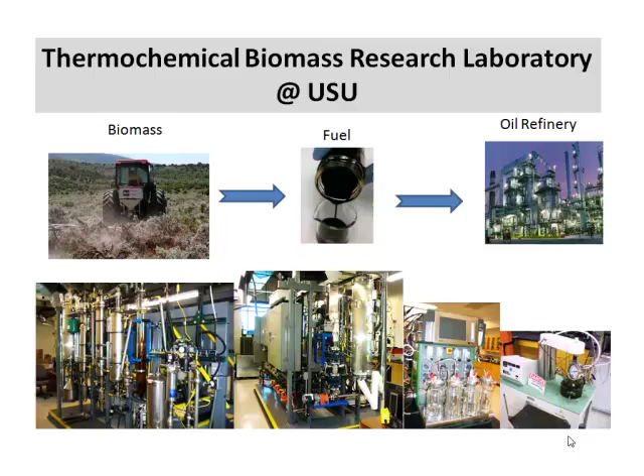As we've already heard from our previous speakers, the utilization of forest residues in producing some form of energy is a strategic approach, because the truth is if you don't do that, then climate change and other circumstances will do that at a cost for you.

Either the wildfire will come and you will have to spend money then. So definitely it is a strategic approach. Whether it's the best way, I think is a starting point.

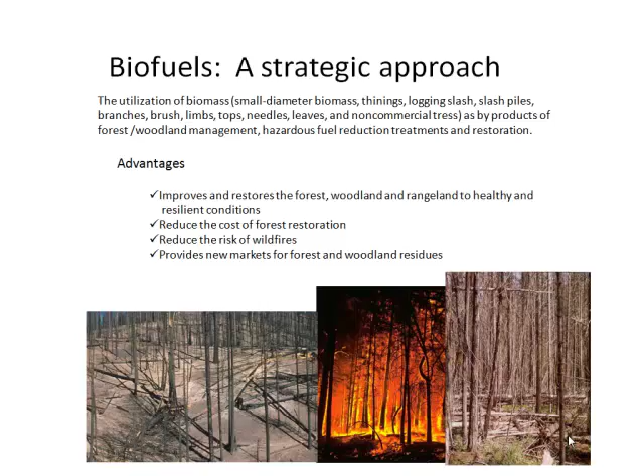I just listed a whole host of feedstocks, simply to present the idea that thermochemical platforms are advantageous because they are not feedstock dependent like biochemical platforms, whereby you have to use enzymes to convert the lignocellulosics into bioethanol. Some issues include inhibition that can destroy the enzymes, but with thermochemical conversion you can use anything. The quality of the biomass is important, especially the ash content, but overall it's not feedstock dependent.

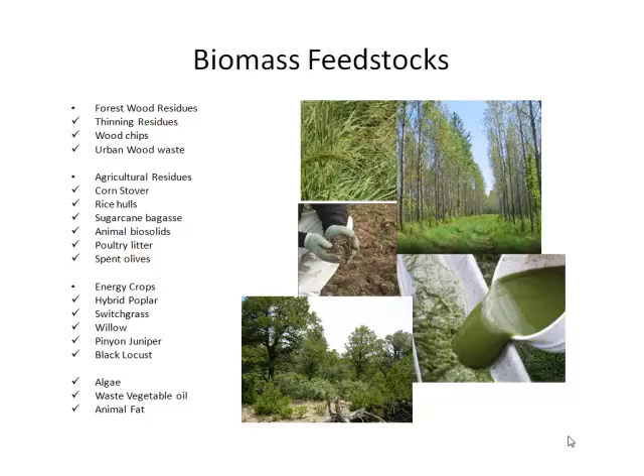So the main thermochemical conversions we've used in our lab are based on slow pyrolysis, where the main goal is to produce solid residue. This has existed for a very long time; it's the process used to produce charcoal.

And now we have fast, or flash pyrolysis, where the goal is to produce liquid product. You thermally heat that in the absence of oxygen, and then you produce some form of oxygenates in a form of vapor that you can condense.

And gasification, as we've already heard from our previous speakers, is one of the routes you can use to produce vapors that can generate electricity. With gasification, you have elevated temperatures, and the goal is to produce gas. Gasification is a combination of pyrolysis, because the initial reaction would have to go through pyrolysis to produce that, and then you have combustion of the char to enhance it.

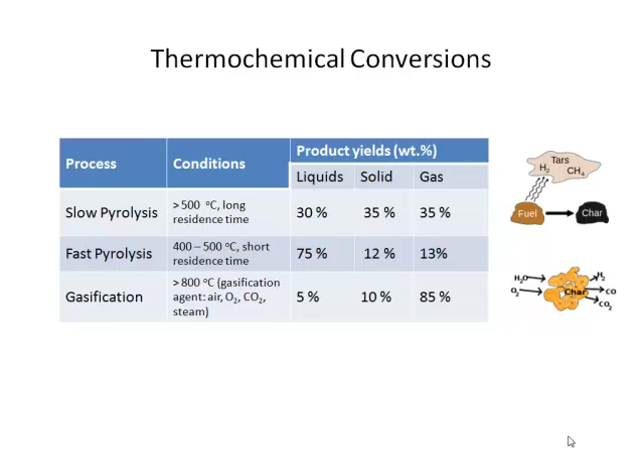This is just to give you an overview of gasification, and our goal is to produce fuel—methanol, methane, DME, that is dimethyl ether, and some hydrocarbon fuels using Fischer-Tropsch technology.

You can also use gasification for cogeneration of electricity, and the previous speakers have already touched on that, so I won't emphasize it much. Depending on your oxidant, you'll be able to produce different compositions that will direct the synthesis of these fuels.

So I've just listed some of them, and this is the hydrogen to CO ratio, which is important in terms of the quality of the syngas.

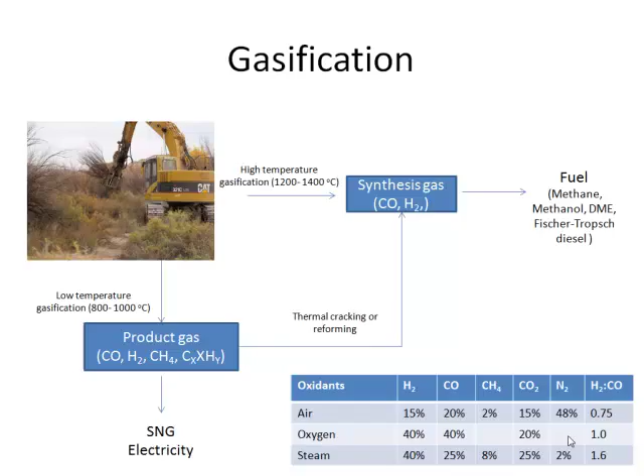This is just to give you an overview of some of the gasifiers available and their scale. Generally, we have fixed bed or moving beds, either updraft, downdraft, or cross draft, at a scale of 0.2 to 5 megawatts, which is pretty small.

Fluidized bed reactors, including bubbling and circulating, are another type of gasifier, at a scale of around 5 to 100. The biggest in terms of output is the entrained flow gasifier. We also have other types like the rotary kiln and combined pyrolysis and gasification units.

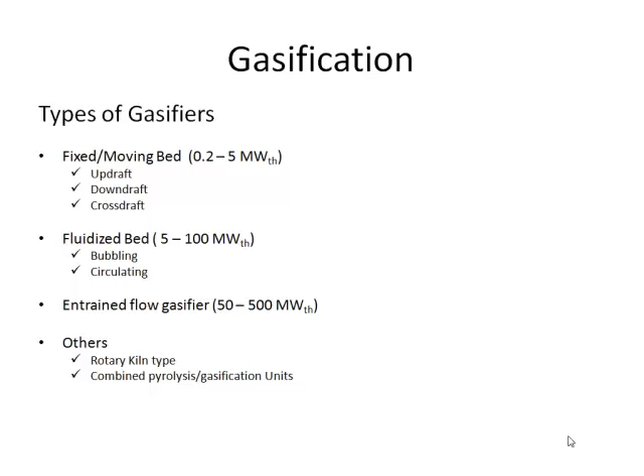And the next slide will look at the advantages and some of the disadvantages.

For biomass gasification, fluidized bed has at the moment been proven to be an effective reactor, because you don't have a limitation in terms of fuel preparation. For instance, a fixed bed has just a limited tolerance for fines—you would have to use coarse materials for that. Also, the entrained flow is limited because it has a poor tolerance for coarse biomass, but overall the entrained flow can produce syngas that has low tar content.

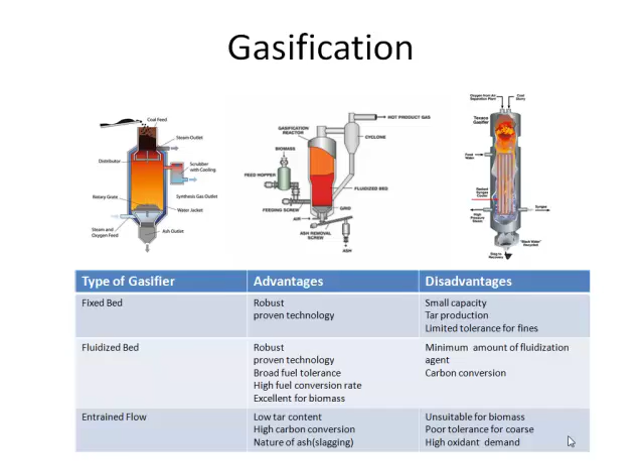And I'll talk about tar, which is one of the issues that affect the synthesis of hydrogen and CO into other fuels. So that's just about that. So, applications.

We know that you can gasify biomass to produce electricity, and you can also use that to produce some form of fuels. As I already mentioned, you can get methane, methanol, DME, and hydrocarbon fuels by Fischer-Tropsch.

This table gives you an idea of some of the operating conditions used to produce these fuels. As you can tell from the syngas quality, for methane you need a hydrogen to CO ratio of about 3 to 1. For methanol, it has to be about 2 to 1. For DME, you have 1 to 1. And for Fischer-Tropsch hydrocarbons, you're looking at 2 to 1.

The particulate content and the tar content really matter in the synthesis of these products. For syngas production, we're looking at particulate around 0.02, and for tar content, you're looking at 0.1. If you're just doing direct combustion to produce electricity or steam, it doesn't really matter—there's no limitation. So basically, the quality of the gas or syngas depends on the application, but our emphasis is more on producing these products.

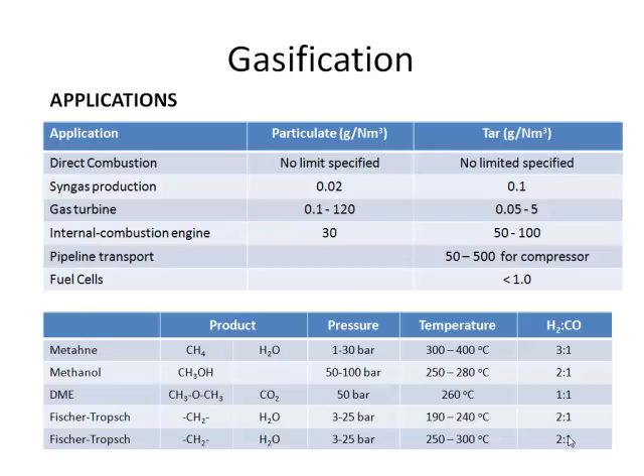Syngas cleanup is one of the important stages in the production of fuels like DME, methane, methanol, and FT hydrocarbons. You can do this two ways: in situ or post gasification. With in situ, you end up with a tar-free product, and then what is left is your dust cleanup, and you can get the clean gas that can now go into an FT synthesis.

With post-gasification, you have your product with the tar, then it will go through some downstream processing to clean up, before you can do your FT synthesis.

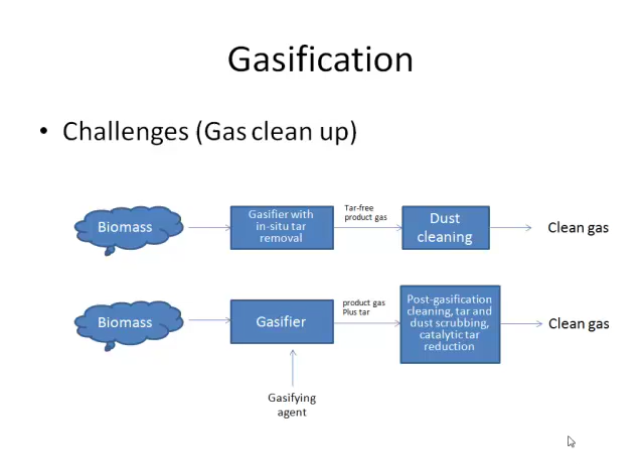So what is tar? Tar is just a complex mixture of condensable hydrocarbons, and you have polyaromatic compounds and 1 to 5 ring aromatics as well, and some oxygenates.

With in situ gas cleanup, you can achieve that by controlling the operating conditions, that is temperature, pressure, residence time. For fluidized bed reactors also, you can use a catalyst as a bed, and with that you'll be able to do some form of tar cracking.

With post-gasification, you can either do thermal cracking, which is at a high temperature, or catalytic cracking, which is at a moderate temperature, and that is more of tar reforming. Then the last stage is more of the scrubbing of the gas and the separation and filtering, and that can be done at low temperature.

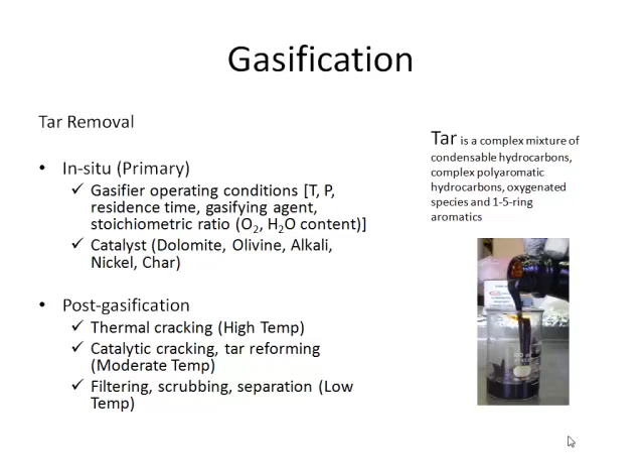So this is just a brief overview. I'll change course now and talk about pyrolysis.

Pyrolysis, as I already mentioned at the beginning, is one of the routes you can use to produce energy, and the focus here is to produce liquid product. You do that in the absence of oxygen at a moderate temperature of about 500 degrees C, and that happens rapidly, in less than 5 seconds.

You produce some vapors. Some of them are non-condensable, and the non-condensable mixtures include CO2, CO, methane, and some light hydrocarbons. Then the condensable come in the form of this dark brown liquid with a smoky odor, and basically what you can do with this oil is use it as a heating oil, and it can also be considered as a chemical feedstock, and you can extract some liquid smoke out of it.

Currently, the only commercial unit in existence is by Ensyn. They use that to produce chemicals, not in terms of transportation fuel, and they extract liquid smoke out of it.

The solid residue, biochar, as we all know it, you can use as a soil amendment or as a slow release fertilizer, and that is dependent on the biomass, because it's not any biomass that you can use as a slow release fertilizer. With our previous experiments we've used chicken litter, so that has NPK. Basically you have a biochar that is rich in phosphorus and potassium, and you can actually use that.

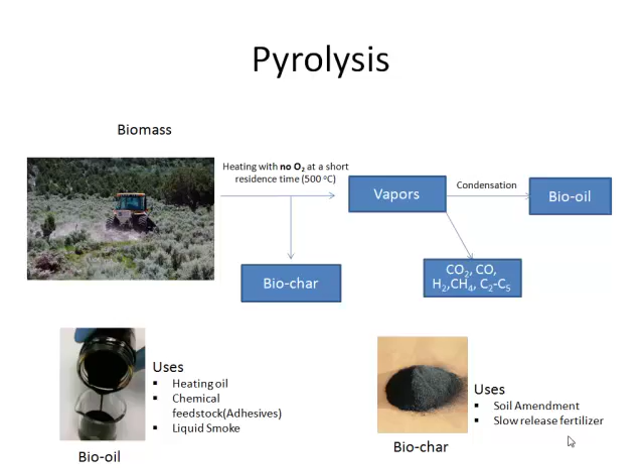Okay, so just some quality about the bio oil. Yes, we can use thermochemical platforms like pyrolysis to produce bio oil, but it stops as a heating oil. You cannot actually go further in its application, and that's because of its properties.

If you look at this table where you have these properties against heavy oil, you realize that the pH of any bio oil, averagely from woody biomass, is about 2.5. But if you take a different biomass that is rich in nitrogenous compounds, that can go up a little bit, and that's because of those nitrogenous compounds—they can go even up to neutral pH.

But for woody biomass, your pH is around 2.5, and you realize that it's low in carbon, and also it has low energy content. Look at the density, which is around 1.2 as against 0.88. Any oil that goes into the refinery is judged by what we call the API gravity, and this can go negative.

It's not good, so it can never go into... Distillability is also important. You realize that with heavy oil, even at 340 degrees, you can distill up to 90% of that oil. If you compare that to pyrolysis oil, you can go up to 250, but what happens is 50% goes into solid.

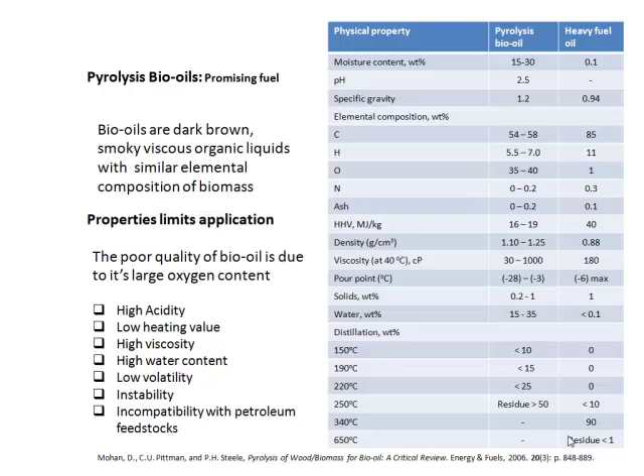But before I talk about it, I just want to talk a little bit on some of the pyrolysis reactors that are currently in use. We have fixed bed and or moving bed, but most research labs are moving away from fixed beds because it's not flexible.

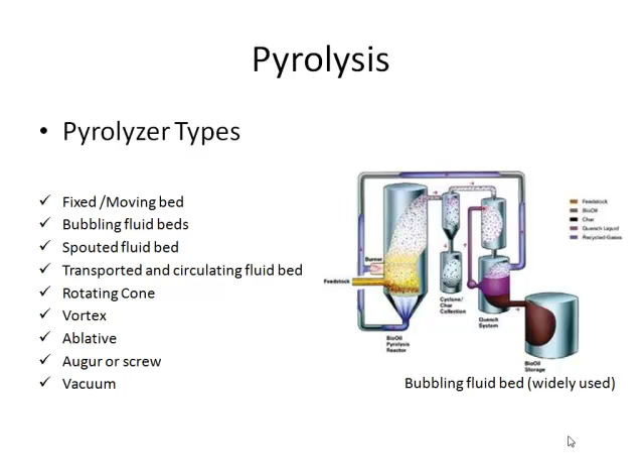Currently, bubbling fluidized beds are the most used reactors in the studies of pyrolysis. And then we have others like spouted and circulating fluidized bed. Circulating fluidized bed is more of a pilot demonstration type of reactor, but for small scales, bubbling is fine. And then you have the rotating cone, vortex, ablative, and we have auger and vacuum. These are all types of reactors that are being used.

So I just want to talk about how we are addressing the quality of the bio oil so that at least you be able to further process that into either a drop-in fuel or maybe as a blend stock, because we need to move beyond the heating oil stage.

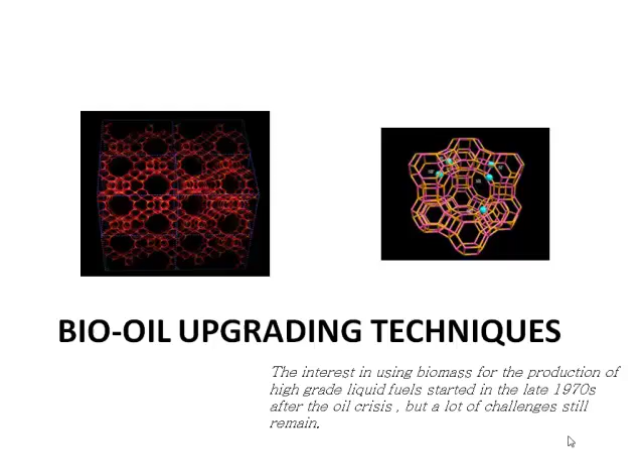Currently, there are two main routes that you can use: you can either use hydrotreating or catalytic cracking. These are all processes that are being used in the oil refinery, nothing new. With hydrotreating, it requires higher pressure, hydrogen, and also some metal catalyst. The only issue with hydrotreating is it's costly because you have to put in hydrogen and you have to put it at high pressure. But it is an efficient process in trying to upgrade the pyrolysis oil and to produce hydrocarbon fuel out of it.

Another method, as I mentioned, is catalytic cracking. With this, it's assisted with catalyst, and you can operate this at atmospheric pressure and moderate temperatures. The only issue is catalyst deactivation, that is the shelf life of the catalyst.

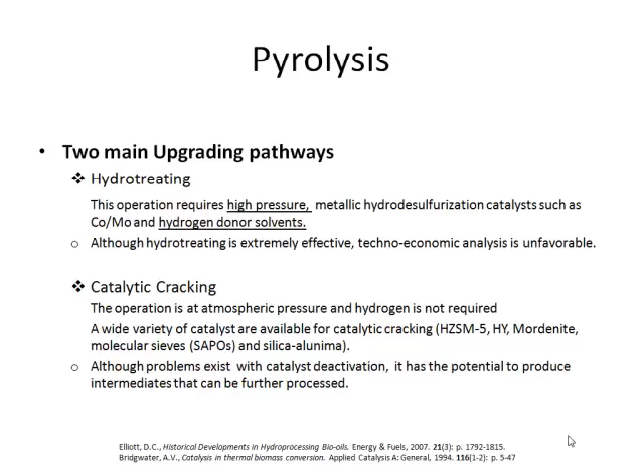But it is a promising technology, and most of my work has been on catalytic cracking using zeolite type of catalyst to produce upgraded oil. This is just a snapshot to give you an idea of the type of catalyst that has been used in upgrading pyrolysis oil. ZSM5 is a favorite and is the most used, and it's a medium pore size zeolite.

Y zeolite is also another type of catalyst that back in 1995 they started using to upgrade pyrolysis oils. The good thing with the Y zeolite is that it's the active ingredient used in the catalyst for FCC cracking in the oil refinery. So if we can apply Y zeolite, for instance, in upgrading bio oil, which means in the future you can actually co-process the pyrolysis oil with petroleum, because they will all together be processed with the Y zeolite. So there is a big interest in trying to achieve that.

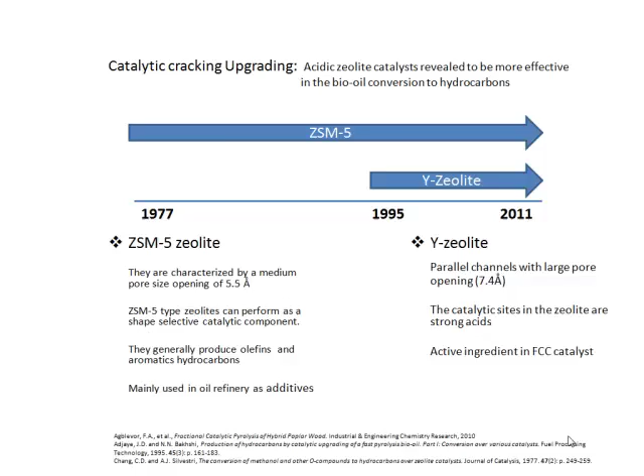And this is just a list of the characteristics of upgrading the bio oil by catalytic cracking. What you do is you lower the bio oil yield, and this is just conservation of mass. You have a bio oil that is highly rich in oxygenated compounds, and all you're doing is trying to remove oxygen to produce hydrocarbon fuel, so it ends up with a lower yield. Theoretically, you can get hydrocarbon yields just a little over 33%, so you can imagine your yield will drastically drop.

But what you end up doing is the oil becomes stable, it's less acidic, less viscous, and the energy content is increased. And now you can actually process that with petroleum crude. And then it also serves as a source of high-value chemicals.

We have been able to produce bio-oils via this route, and we've done blending of the bio-oil at 15% with crude oil. We co-cracked it to produce gasoline, and we've only done up to 25% of blending. We've also been able to produce chemicals like phenols that we've used as a substitute for phenol formaldehyde resins. So you can actually do that. This is just a snapshot of bio oil after upgrading. So that is the direction that our lab is just focusing on right now.

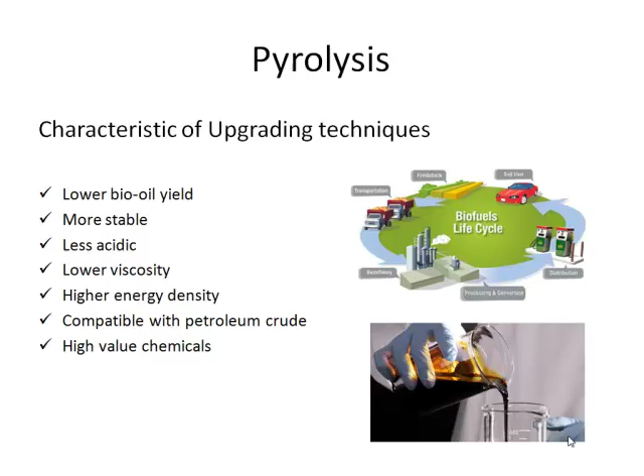This is just the last slide, and basically with all the thermochemical platforms, they all have some kind of challenge, and this web is showing you some of the challenges that kind of prevent moving from a lab scale to a commercial scale, or to a demonstration, then to industrialization. One of the issues is feedstock: you're going to talk about cost, quality, logistics in getting to the biorefinery, and then the quality of the product, and also policies.

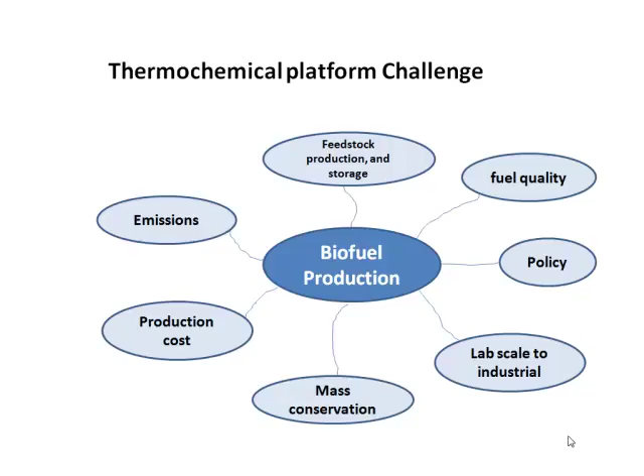And then we have intensive R&D sponsored research, mass conservation, how to minimize byproducts to enhance the yield of the main product, production cost, and also emissions. So these are all issues that kind of face the production of bio oil. I just want to end here, and once again, thank you for your attention.